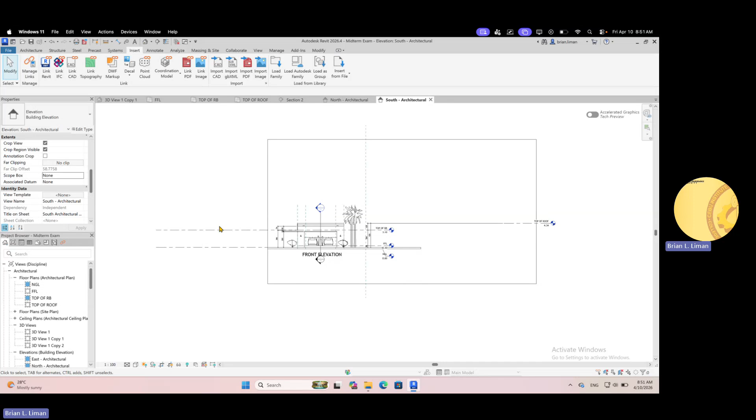So here class, review na to ang inserting entourage like cars. So where to find the cars and vegetation? You go to Insert here, then Load Autodesk Family. You need internet for this, internet connection. Insert, then Load Autodesk Family.

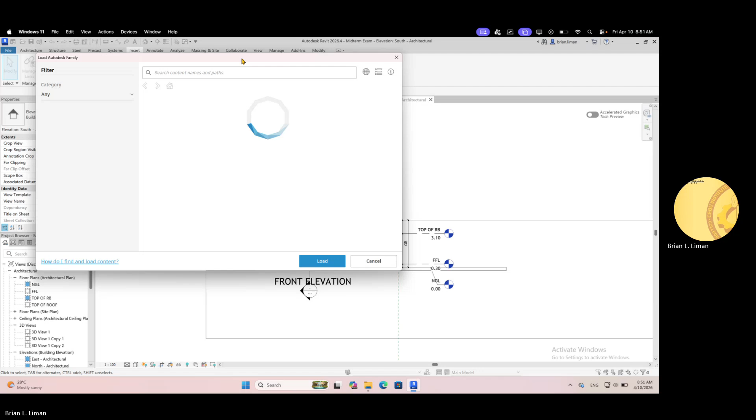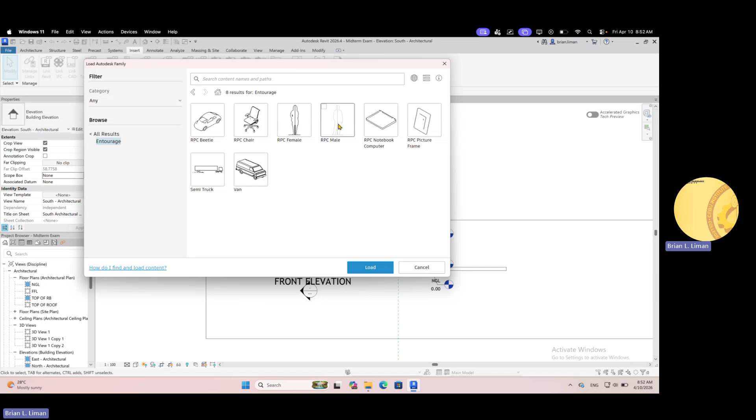This dialog will appear. You have options. So for cars and related items, you go to Entourage. Then let's say for car, you pick lang and then load. Okay? For people, RPC, click lang kana. Then load. So once you load, example, this one, this van, you click that, then load. It will download, of course.

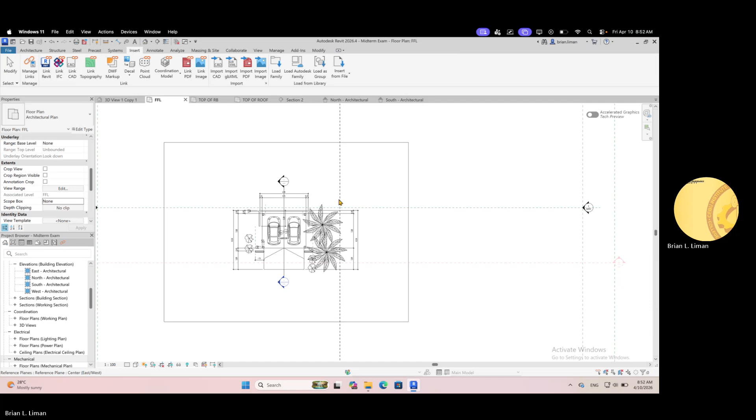Then you go to FFL. Then you type CM for component. So it will insert the latest item you have downloaded, like this one. Click lang, then escape. While inserting, you can also change the component that you will insert.

Another item is Load Family. Kani siyang Load Family class, the difference is need na siya i-download into your system, sa local nimo. Okay, pero heavy man na siya. I suggest lang ang Load Autodesk Family kay cloud lang. Okay, pero if imong storage dako, then you can have the Load Family. You follow lang this instruction.

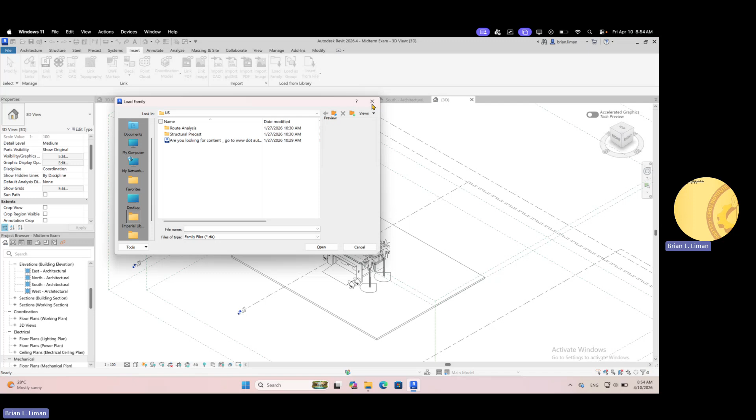Again, the idea is families sa Revit. No? You need to download and ipasod na siya sa imong system, sa imong computer storage. Medyo dako lang ang ma-occupy na storage. So for practicality, go for cloud lang, Load Autodesk Family.

You can also get families from other sites. Daghan mga Revit files, mga created na daan. Okay, mga doors, furniture, windows, and mga entourage pod class. But careful lang on the size. Some items might be too heavy. Basig mapugatan na imuhang Revit file.

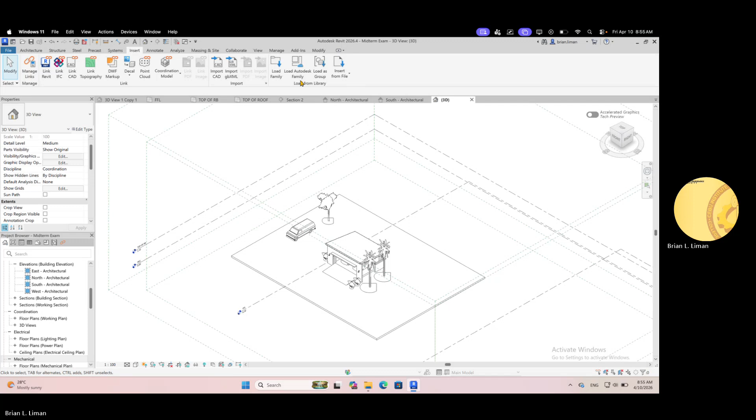So other designers, sa Revit, structure lang, and then basic lang entourage. Then export the structure of Revit to another program, for example, Lumion, Twinmotion, or other program. Dito na ang mga detailed components, mga vegetation, cars, and people.